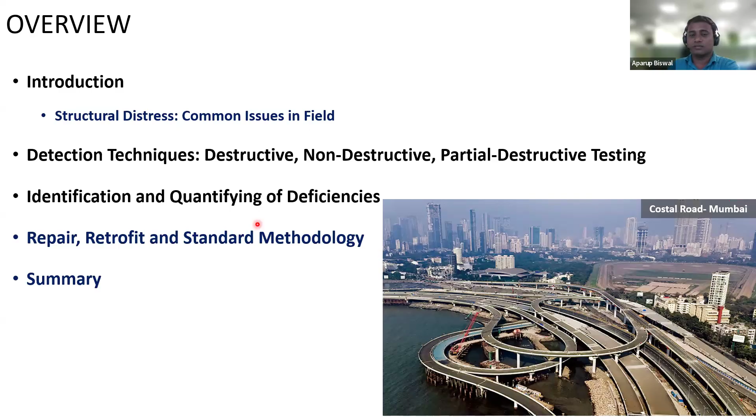These are some projects, I don't need to explain them deeply, you all will be knowing this has been happening. MHSR is our high-speed rail, where you have single segments, meaning a full scale, full length box girder. We have track slabs running from Delhi to Meerut trains. We work on tunnels, and currently we are doing precast water tank stagings.

Narendra Modi Stadium, again you all are aware, and Dwarka Express, where we are using box girders, I girders, those things to build it. Here I have shown you what we do in precast, and what we achieved - the span, which is a 33.3 meter U girder, which is now going to be the largest or longest span available in India for a U girder. Everyone might be knowing U girder.

U girders are used in metro projects where instead of having any box, you have a U shape to run the metro on it. These are some mass housing projects we did. We did 96 days, 96 flats.

This is in Mumbai. A few months back, we did Mission 45, where we got a 6-story car parking done in 45 days. Again, this starts only from the superstructure part. I am not talking about anything on foundation, which is not to be considered in precast.

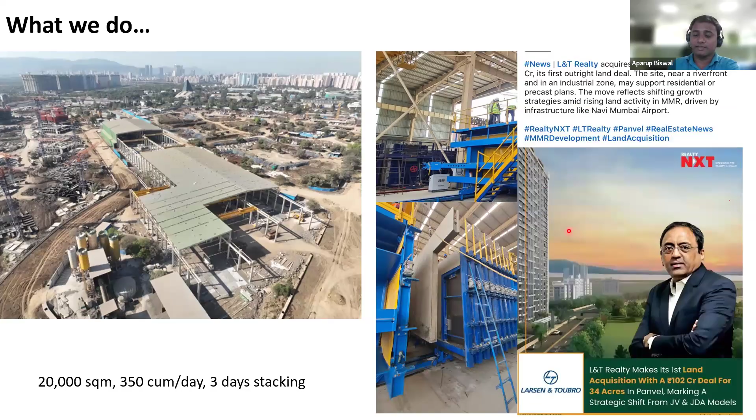Let's come down to today's topic. This is Mumbai. I know you all will be aware that we are growing, in both the verticals. Somewhere we are growing horizontally, cutting down trees and occupying the areas. Somewhere we are growing vertically. Are we growing fast enough to get accommodation for all our beings? I don't think so. We are having so much shortage.

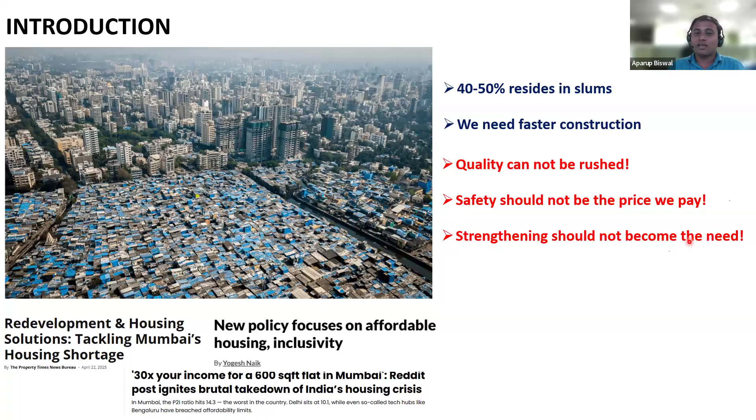But remember, to achieve all this, we should not compromise. We should not compromise on quality. We should not compromise on safety. And finally, strengthening should not be needed on day one. On day one, we should not be targeting that we are going to do some strengthening. And that's what is happening in many projects. Many projects from day one are going to strengthening.

Strength and safety is answered, but what is not answered in non-structural cracking is serviceability. Maybe my structure may not perform to the intended function or intended life, or it may show leakage, dampness, corrosion, or vibration. Those are due to these non-structural defects.

When it is structural, you need to go for strengthening or some sort of enhancing the strength. Both topics will be covered, I think, by multiple presenters or researchers that you will be hearing. I'll also be touching certain parts out of it.

How do you detect it? You can do destructive testing starting from core. Core is obviously destructive - you take something and break it. You can also do non-destructive or partial destructive testing. We'll touch on those slightly, and go to the test parts a little bit too.

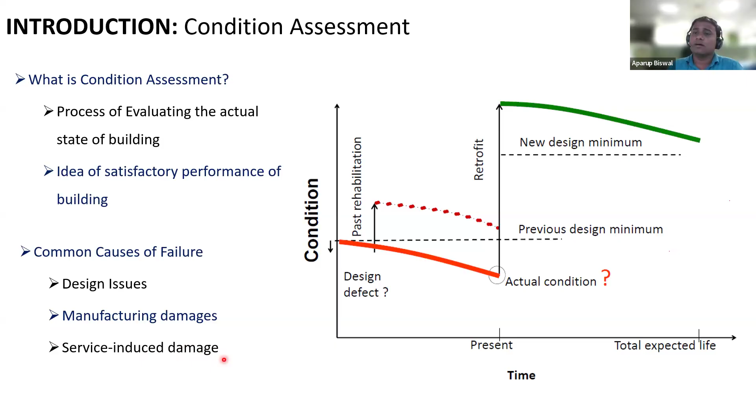Now, for these two, you do condition assessment. And then what causes are you looking at? You may look at design issues, which come due to the designer's mistake or miscalculation or misprediction of the forces. Manufacturing damages mean something which has come because of construction issues. Service induced generally means you have intended for X amount of load, and now you are applying something higher.

Let's see some more details. Once you go to do condition assessment, you do initial inspections. You go to the site, you inspect the structure for which you are doing the condition assessment. And in that process, you may go for a detailed investigation.

In that report, you will point out what other type of test and analysis you are going to do. Then you report it. The main part we sometimes miss is we don't report many things we observe. We may think it is non-structural and doesn't hamper structural safety, but at a later stage.

That small part is going to lead to structural failure. Then, what symptoms or causes will emerge? Like once you go to a doctor and say I am having this disease, he may not treat only the disease, he may ask you lots of questions. So we should be thinking about lots of questions here. What is making this happen? Is it because of life which has gone for corrosion, or is it in the initial stages where thermal and shrinkage cracks have come? That is going to come for high strength concretes, and slowly we are looking at more higher strength concretes.

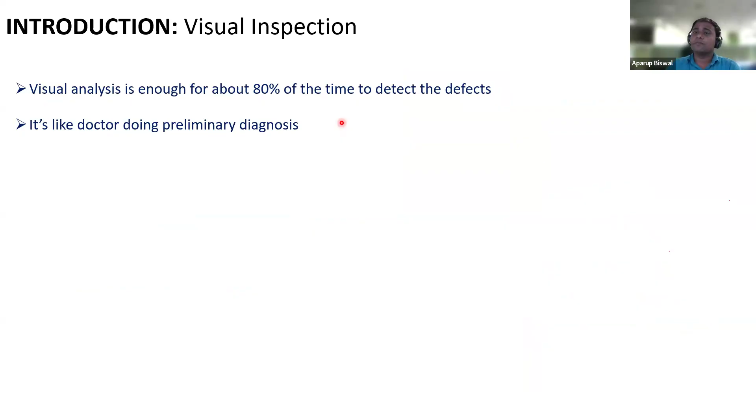Now, once you go for inspecting, you do initially a visual inspection, and mostly 80% of the defects you will be able to find out. It's not that you find out and stop there - you report it, you note it. It may be helpful today, or it may be helpful tomorrow based on structural performance. Then, what you will be using - so many things are there.

You may require multiple of these things to assess a structure, and these type of defects you may be able to see. You may be seeing some honeycombing, you may be seeing some cracks, you may be seeing dampness, but those localized reports are actually going to help us while doing rigorous structural analysis or trying to find out what has caused these things.

What limitations do we have in this visual inspection? Who is going to do it, whether he is qualified to look at it, and what he is looking at. Again, it may be reliable, or it may not be reliable, depending on the person who has done the visual inspection.

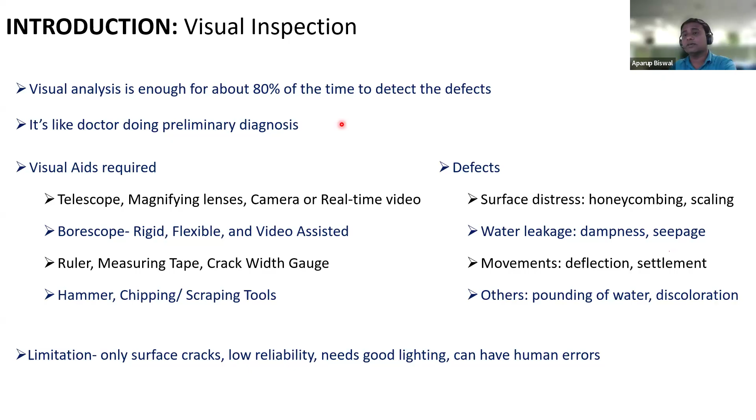Now, once you do visual inspection, you have concrete members. You may look at cracks, which are these. You may say, okay, I have a fine crack which is 0.8 to 1.5. Someone else may not notice it. You may say, okay, I have a medium crack which is between 1.5 to 3. These are some examples I am writing.

You may not be able to see certain cracks. Maybe someone else is able to see because he has better eyesight, or he has gone with better instruments. Similarly, when it comes to steel members, you should be looking at all these - whether a bolt has corroded, whether a member has corroded, whether a member has buckled locally, or is showing some crippling or local buckling.

So again, this depends on who is inspecting and what is being inspected. Let's assume we are going for a bridge inspection. We may not be following all these rules at every location. I know this is a flexure-governed location, so I may be looking at flexural cracks, and when we go to shear-governed locations, we may be looking at shear cracks.

Now, this distinction makes sense only if you are qualified to know the difference between flexure and shear cracks. If we are not aware of what to look at, then we end up doing a wrong report or wrong visual inspection.

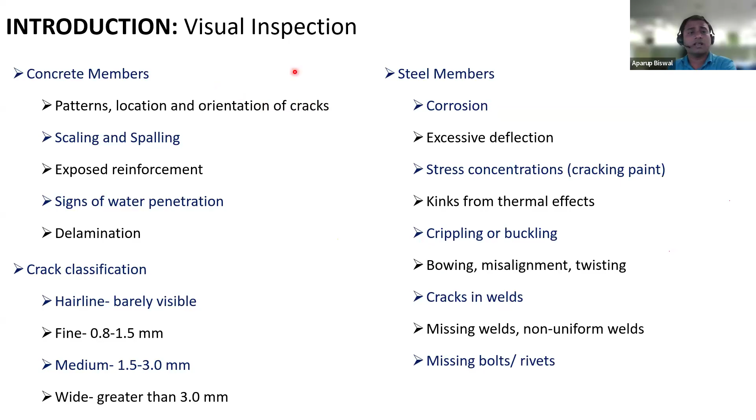Now, based on the visual inspections, it is common practice that we come up with a non-destructive testing plan. From the non-destructive testing, what will we be looking at? We'll be looking at multiple activities depending on what structure we are doing. Let's now go to the detection techniques, which include destructive, non-destructive, and partial destructive methods. Wherever possible, I will give you an example.

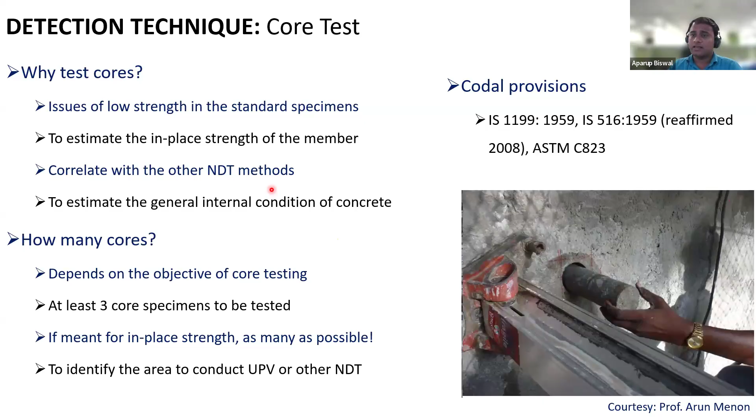Whether you are crossing the reinforcement or cutting through a confined area, you may get a higher strength, and maybe that's not the required area. So you should find out which area to take the core from and what ultimate strength you are looking at.

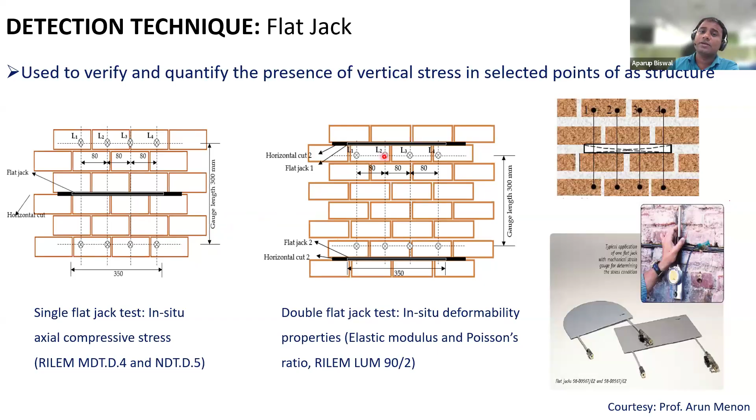Why do I need it? I need it to assess the life of the structure, to know how much load I am expecting, because for many structures we won't be able to calculate the actual load. Sometimes these masonry structures are not homogeneous structures; they may have multiple leaves inside them. In those cases also we need to know whether those effects are present or not.

What can be the error here? Multiple errors. Like I told you with core cutting, similarly here, depending on the morphology of the structure, we may have errors, which we need to take care of properly. This is the standard case which we are expecting, but we may get multiple different cases. Now, how is that done?

Let's take some local pier at a particular location. Initially it is marked and initial readings are measured, using a DEMEC, which is a mechanical gauge. Initial readings are measured, then you mark where your flat jack is going to go. You fix the device which holds the cutting wheel, then you cut it. Then again you start taking measurements. In that sense, you will be able to know how much load was present, with those limitations I pointed out.

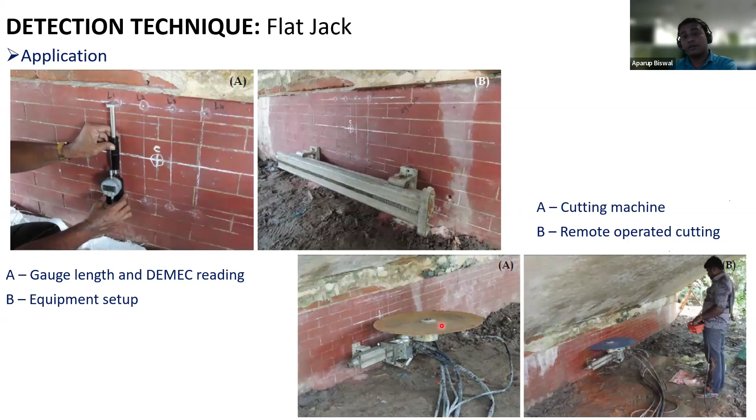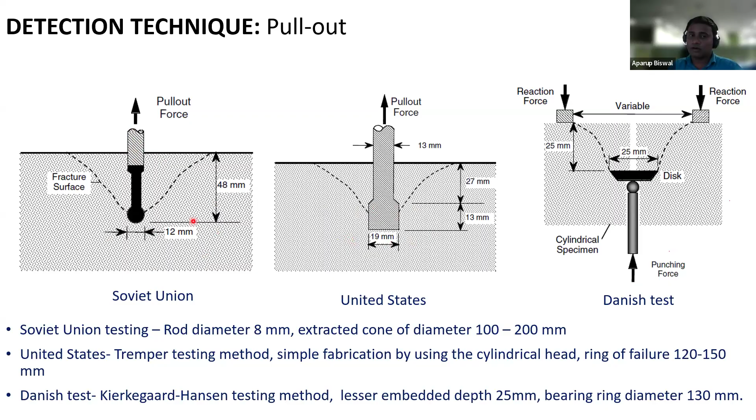Sometimes we install it prior to know the strengths, and sometimes we do it on the surface. This is known as pull-off. Again, from the pull-off strength, we are expecting to predict the compressive strength. These pull-out or pull-off results depend on how many repetitions you have and how you have calibrated your graph. That means you should have calibrated your graph well beforehand, to know that if I have a pull-off strength of 1 MPa, I'm talking about 15 MPa concrete; if I have a pull-off strength of 4 MPa, I'm talking about 50 MPa concrete. So these things matter.

Next is the rebound hammer. I won't go into it much. This has limitations and multiple methods to read it, and sometimes it only reflects the surface-based concrete quality. If you have done proper packing at the surface base, you may get a higher strength reading.

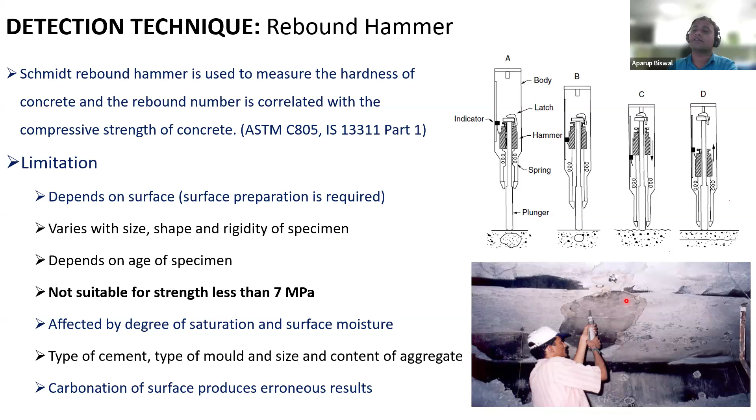Then that doesn't convey that your structure has the highest strength, whatever you have reported from this test.

Let's come now to a widely used, I can say misused, test: UPV. There are three methods - direct, semi-direct, and indirect. All three methods are being used and you get some output.

And based on that you reported the quality. It depends again on what thickness you are looking at, what material you are looking at, whether the material has any defects or not. We'll see some examples of this also.

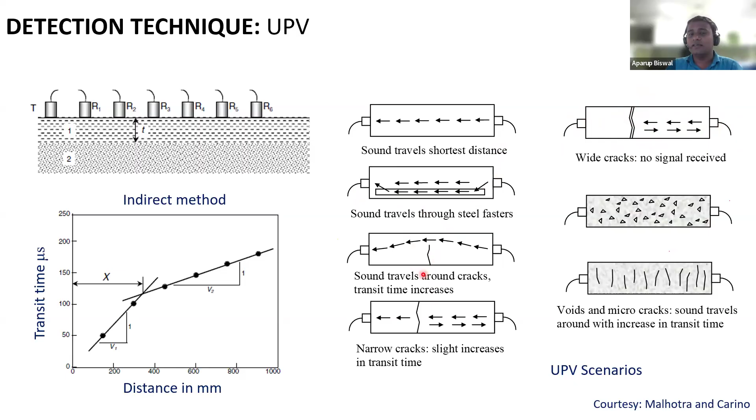Again, reinforcements will affect the results a lot, and we can use UPV to get the crack depths. I will show you in the next slide how that has been done.

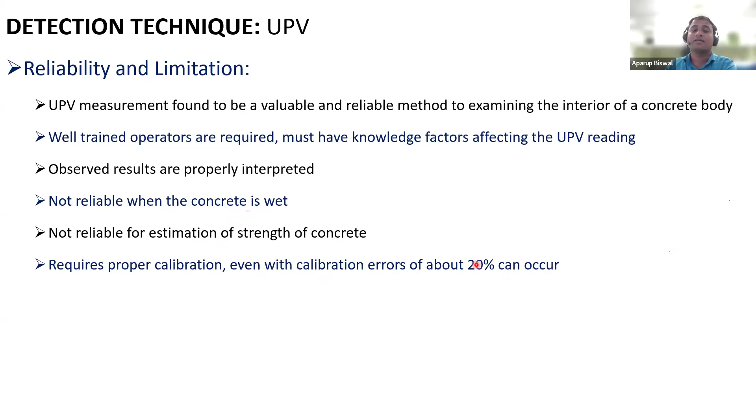Now, is it reliable? It is reliable depending on who is taking the measurements, and not reliable depending on what conditions he is taking the measurements in. As I pointed out, it depends on how much steel is there, whether you have moisture in the concrete, whether it is raining, or whether it is a very dry day. All these factors will matter, and you can have a calibration error of 20%.

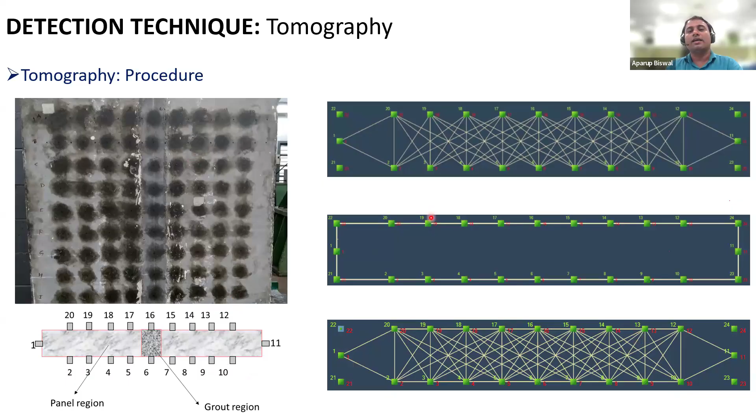Too close between the probes are also dangerous. Too far between the probes are also dangerous. And what is the intended path which we have in this flow? Then what is the periphery that we are looking at?

So we can go to various tomographic available softwares and start doing data input, then do preliminary work, like what type of paths we are looking at. Then we defined what area we want to concentrate at.

Then meshing is the parameter where you know this is the probe distance you have taken. So if I say these are the two points which I have taken, based on that, how finer I want to go in the tomographic curves.

What tomography will do is, whatever data we gave it, it will start calculating the error. Error means it knows from here to here the path is having a distance x, and the time taken by the machine is t1. From here to here, the path becomes x plus delta. Time taken should have been t1 plus delta 1.

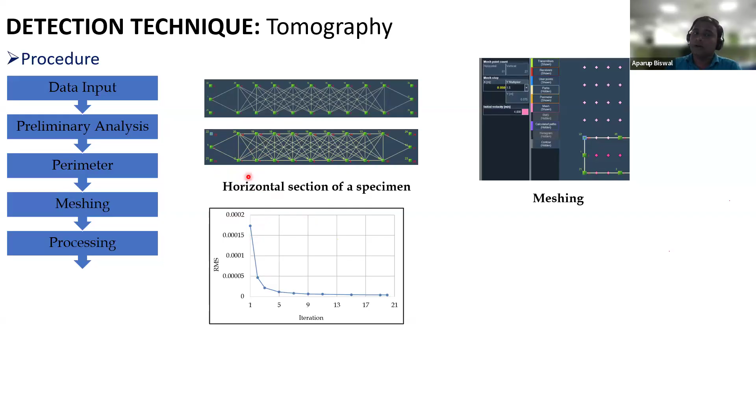Now let's assume the time taken is something else other than that. So it starts calculating what could have been the alternate path it took to reach that point, and it has multiple options to take. Based on that, it will start telling you the intended error function you had. Beyond that, how many points are there, and below that, how many points are there.

And it starts giving you a plot which is a velocity contour plot having different colors depending on your intention. So my intention here was to give 4000 as good quality concrete where concrete has no defects, and 2000 being the least poor quality concrete where concrete has some impurities, defects, or interfaces or something.

So what I can show you is that something is happening in this zone, and in these dark zones it is good quality concrete. So that we understood initially by UPV, where I showed you the curve changing the slope between the segments.

Similarly, you can see here where I have taken two different cases, one with defects, one without defects. You can see tomography is easily answering that. These are the zones where defects are concentrated, and it requires certain concentration, certain strengthening, or certain intervention like grout injection, which can be taken care of locally in these regions.

When it comes to this case, we are almost having a uniform concrete. I should point out here and here I have the joints which are supposed to have some defects, but that has been taken care of in the hacking, meaning roughening of the joint and grouting while filling those joints.

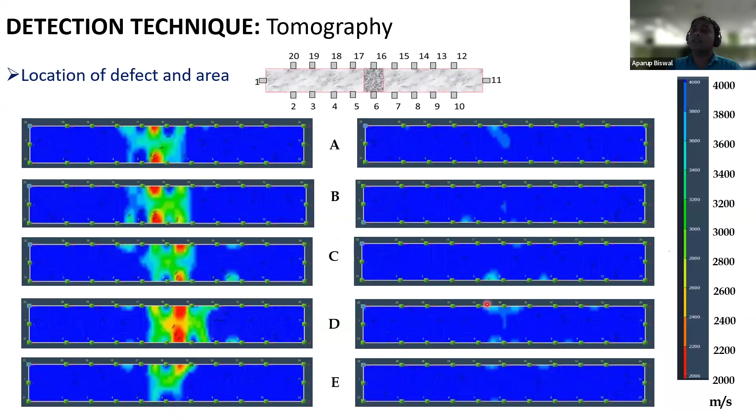And marking of patches where higher values are there and lower values are there, where a little bit of intervention may be required by means of injection of grout based on various methods.

So we don't stop here. From here, the strengthening people will take over. They will start analyzing your results or findings and start devising the method how that can be strengthened, or grout can be injected, or seepage can be stopped.

Again, is it the best method which gives us everything? My answer is no. None of the techniques can be the best. You need multiple techniques to answer the same question. You may be looking at it multiple times to find out what is going on in the methodology.

So what can go wrong? We have properties which are multifold. We have properties which are nonlinear. We are talking about materials which are nonlinear. So the first thing that is going to affect us is nonlinearity in our materials, members, or interfaces.

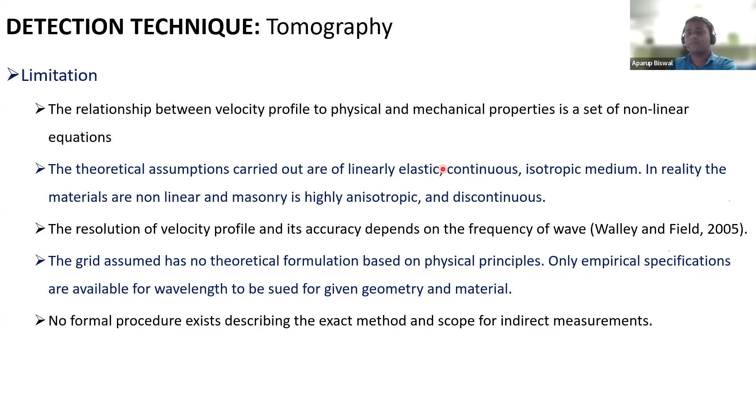So with that background of non-destructive testing, I don't know whether questions in between are allowed or not.

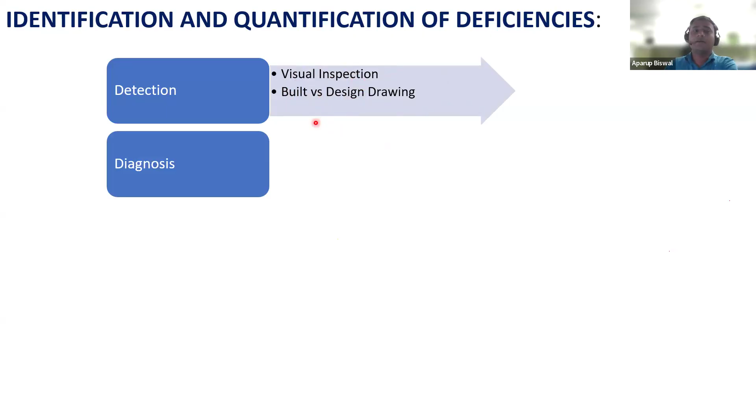Then you go to diagnose. Here you adopt a method from NDT or DT. Then geometry verification, here I'm talking about the sizes. You may think everything will go fine, but the person reading may have read 300 as 200 and 600 as 300, and end up with a different size. Whether that has been verified at site level, I doubt, because so many structures are going on. We have limited engineers at site to verify, and sometimes we depend on the contractor directly, or an unqualified contractor, without thinking much.

Then analysis. Preliminary is always like what you did in design with software, trying to understand whether the design and the intended function of the structure are being satisfied or something else is there. Then you take a decision. In this decision, you may think about going for micro or macro level finite element software and going deep into the analysis. I may compare the design intent and go with deficiency calculation.

Always remember, after diagnosis, if the preliminary report says everything is answered—let's assume the beam should be simply supported, but in design intent it was continuous, and on site we achieved a simply supported beam—the beam is going to crack. Now I know the answer, so I should push it back to the original position if possible, strengthen it depending on requirement, and get the continuous arrangement available.

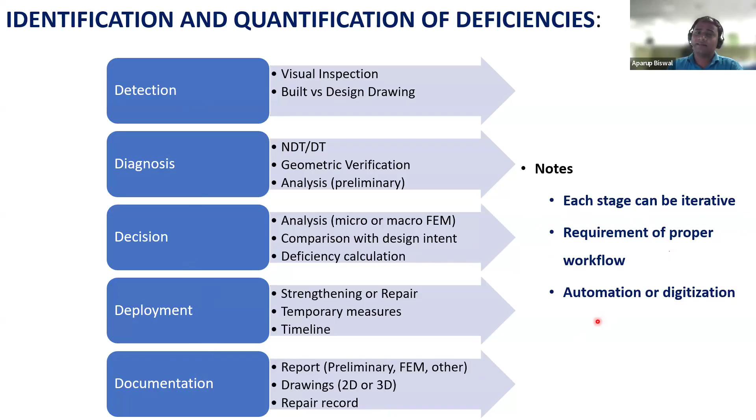Then I pointed out in every slide that you need to report. You need to have proper drawings - we are engineers, we will only understand drawings. It may be 2D or 3D, depending on the project requirements. And what did we do to the structure? Did we repair? Yes, then please note it down. This is what has been done to the structure during construction, and this is what has been done after construction. So each stage can be iterative. It's not like once I wrote it, this is final - I might have not followed all these everywhere. Then these workflow requirements will be dependent, and we may automate or digitize the processes.

Let's now go to some finite element example. Here I'm just talking about what finite element can do. You can go to any member - it can be column, beam, or anything depending on your structure. You do an initial model, which we spoke about, it will always be a line model. Then from the line model, you understood that you are not able to understand a few of the concepts, few of the transfer mechanisms, or few of the designer's intentions. The designer is strongly telling that it is safe, and the contractor or client does not have any faith.

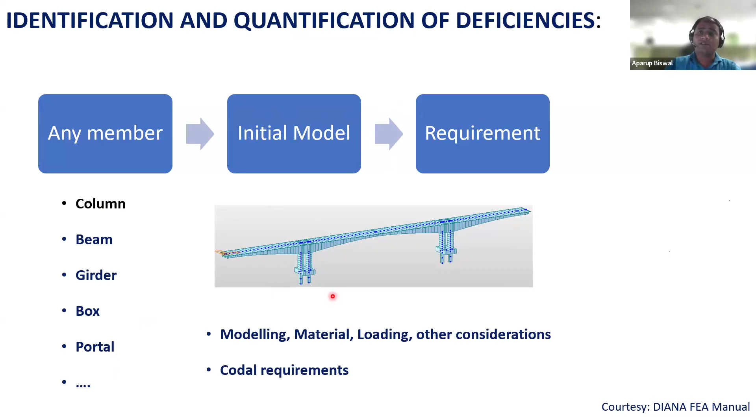He is telling that no, it is not safe, it has these many problems. Now the designer wants to prove it, so he will go to the rigorous finite element, where I go to a local element. Now here I showed you the complete span, which is a balanced cantilever having everything - bearings, pile cap, piles, piers, every detail. But when I came to here, I want to prove only the concept of the box girder, or only the concept of the diaphragm, or only the concept of some part where I want to show.

If you are able to see it, good. If you are not able to see, just put a question mark and send it to your designer or whoever is going to analyze it. He has to answer these - how these have come.

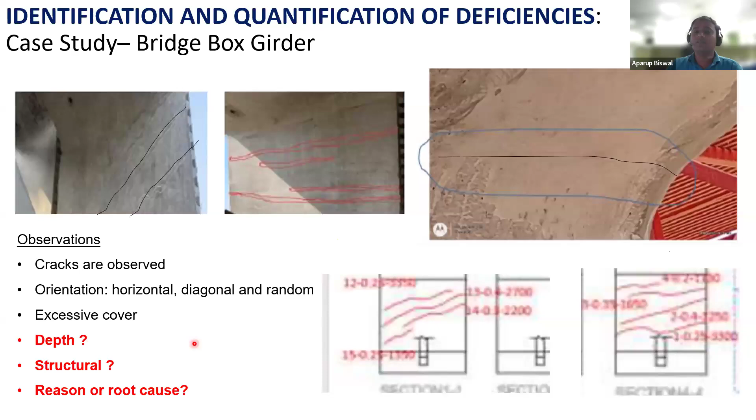So let's see what extra data we saw. This is not the real picture, these are also not the real pictures. You saw that cracks are there, and you took cores. So some NDT has been done - that means UPV, rebound hammer has been done. Then core cutting has been done, and crack depths were shown.

So now in these observations itself, it says that some cracks are stopping here. So now you need to know whether it is cover - if it is cover, how much cover it is, because sometimes you may end up with higher cover and end up with a crack. Your thermal crack has gone till the cover depth, or shrinkage cracks have gone to certain depths - find out the pattern of the crack. Based on the pattern of the cracks, it will show how it has been done. Now go to the analysis software, start analyzing and understanding the results. So here, some schemes were decided, what can be the cause, what was the root cause, and how the cause is being treated - that has been identified.

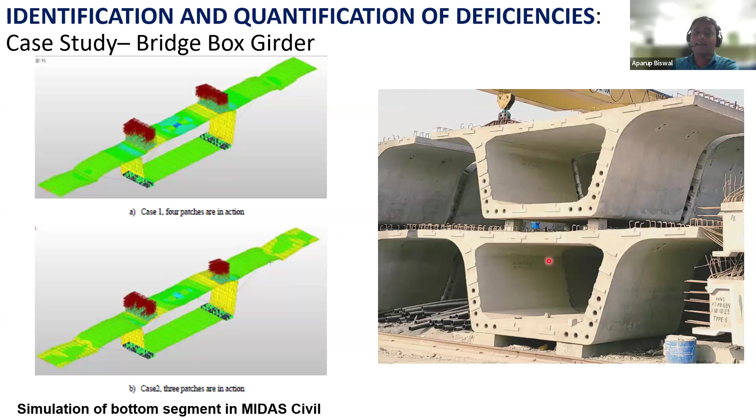And finally, the results are shown, like we saw some lines marked earlier. These are the straight cracks which are possible. We saw some lines going slightly inclined - these are the patterns found out. And we saw some diagonal, pure diagonal cracks - these are the regions found out.

Remember, all these are bending moment plots found based on the analysis for a particular case, and the results are found, and based on that, the crack patterns are predicted. In this prediction itself, we'll start predicting what has happened to the rebars, whether the rebar has yielded, whether I need to replace them, or do I need to strengthen them.

Let's take one more case. I showed you one case with a bridge. Let me show you one case with a building. Here, this part of the beam was resting on this beam with a support, and what you see is failure of this corbel. There are multiple locations which are supposed to fail in the later stage, and we need to find out what can be done.

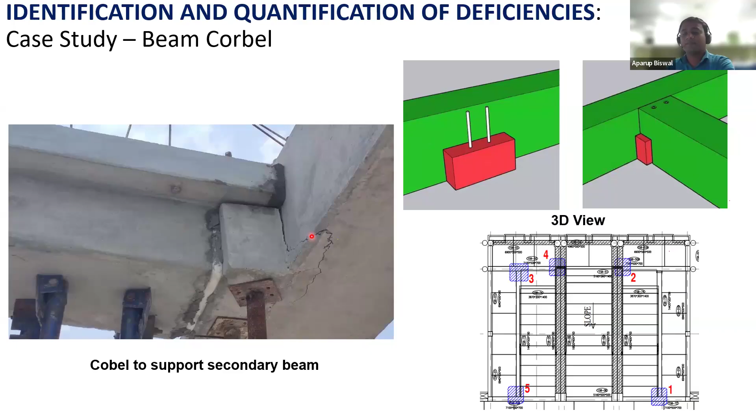So this is what was intended. This part is supposed to come from the primary beam with some dowels, and this green color beam has to rest on it with that dowel and do the function. What next? Let's find out what can be done.

This is being done because at certain locations the loads were quite higher, and only this cleat angle with these bolts was not sufficient. Now the load has to be transferred to the beam top by a mechanical arrangement, where this hanging arrangement was built and the load is now getting transferred from this part of the beam to the green part, which is the monolithic part.

Now, once you do that, you will ask, like, what will happen to the corrosion? What will happen to the service life? Will the steel part always be visible? Now we need to hide it. So you see some casing, and then we start putting it with the grout.

When it comes to analysis, individual parts are analyzed for different forces. And in this part, intentionally, all loads are analyzed for one part itself, so that the bolts are always safe. If, because of some uncertainty, one part is not erected properly or not fixed and the load is live on the structure, then a single part has been taken. Then failure modes for the bolts, failure modes for the plate, failure modes for the sections are taken, and the final strengthening scheme is proposed.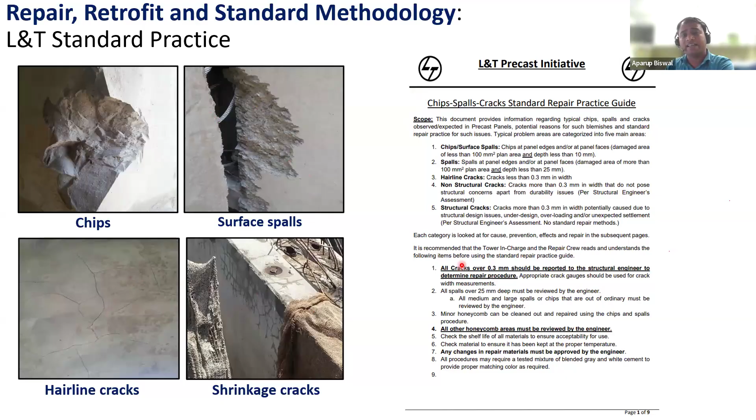It will be the diameter of the bar - are we talking about smaller dia bars, larger dia bars? What is the position? How far has it gone? What orientation is it supposed to be? And what strength of concrete are we talking about? It's not like we can drill anywhere or fix anywhere.

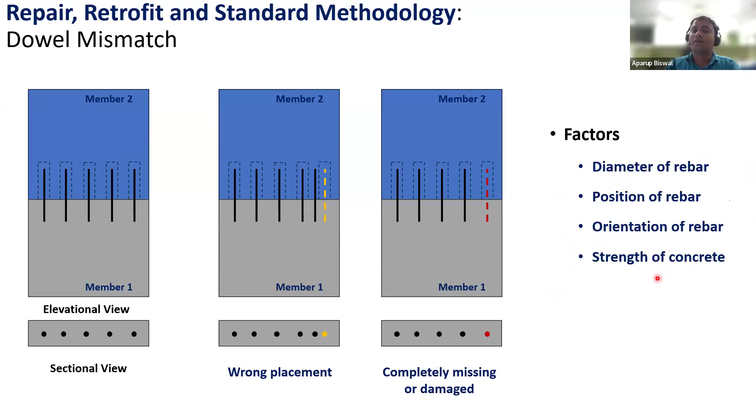Based on that, we come up with certain methodology, like we need to drill, we need to insert a new bar, if a dowel is required and installation is required for a new dowel, for the dowel which are locally adjustable, like the one we talked, which is just next to the dowel tube.

So what can be done? You locally chip out the concrete, bend based on the design requirements, which is 1 in 6. Everybody on site will know how to do that. Based on that, you change the orientation and get your intended function. That can only be done if you have sufficient depth available to break out, or sufficient width available to break out, and you are locally able to adjust it.

Otherwise, you go with a new installation method. Then you start reporting it. That's what is being followed. Intentionally blackened out or covered details which are not required to be shown to you.

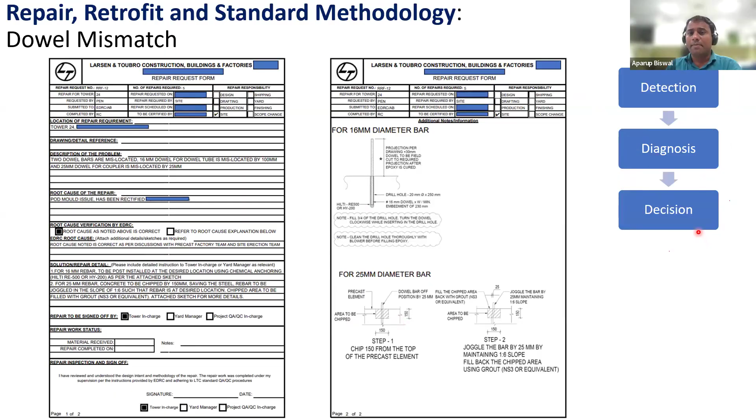So what we have followed is: detect, so you find out what is going on; diagnose, you find out the cause, what has been required and where it is now; take a decision whether it is new Hilti or old being bent; then deploy your method, do that; finally, you document it. These 5D techniques need to be followed, and you do it so that you have a proper report for your future and for your next project.

Before taking up the project itself, you can tell, these are going to be my methodology where I do these works in this way. Now let's take one more case where I have a beam...

Now let's take one more case where I have a beam coming from two walls with a cast-in-situ slab. So this color is CIS slab. I have two orthogonal walls and the beam is there. Now the top bar of the beam goes into the CIS slab, and the bottom bar of the beam is supposed to go into these walls. And we have completely forgotten to remove the rebars from the walls, and the beam is now being readied to cast.

Now in this case, the designer would have told you, okay, for this beam, I need 3 bars here. Now, if you see, this is only some 150 or 200 mm. A bar in the beam can never be developed here. And if you go to any mechanical anchor people, they will tell you, I cannot develop it either. And you can never drill perpendicular like this and bend a bar. That also cannot be inserted.

When it comes to the top, you have freedom. You can just put a rebar at the top in the CIS concrete and do that. So here what matters now? Diameter of the rebar we are looking at, position of the rebar where it was, orientation - like in a thin wall, it's supposed to come like this - and strength of the concrete, thickness, do I have sufficient thickness to drill in? And again, orientation of the panel also matters. In this panel, you may have sufficient depth to drill in and put a bar, but in this panel you didn't. So these are the certain requirements.

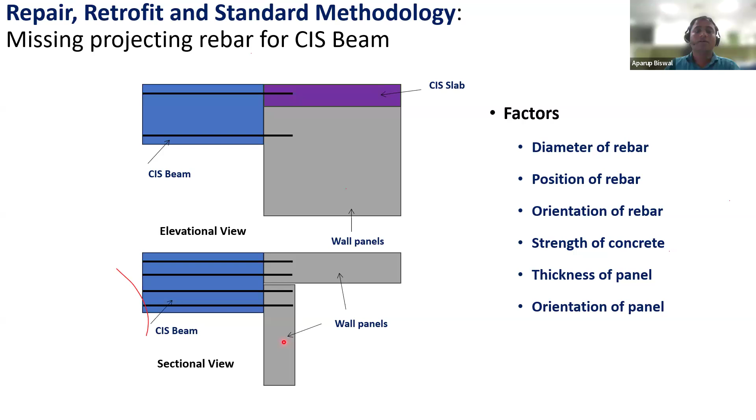Now let's see what has been done. The designer requirement was 3 rebars. Intentionally, one extra rebar is added. You all will be aware that if development length is not properly available, we can increase the steel based on the development length required. So based on the same scheme, increase in steel is proposed in the part where lesser drilling depths are available; where larger drilling depths are available, the actual rebars are kept, and at the top, because it is CIS concrete, that also is taken care of.

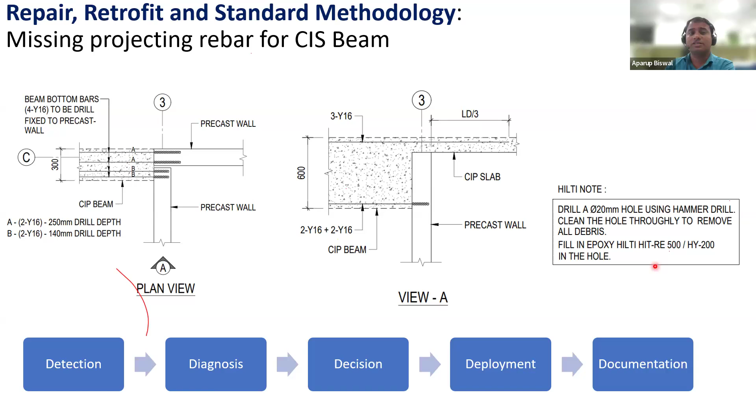As I told in the beginning, I belong to precast initiatives, and we have a lot of precast planks. When I say planks, they are thinner sections, but two-dimensional, meaning length and width are higher. Once you cast it flat, you are susceptible to getting a lot of shrinkage cracks. Those are non-structural in nature. They may not hamper your structure, but we need to close them. So now we will see some grouting methodology or injection methodology for those. So now what will matter?

Slab design consideration: how the slab is designed, whether this is just a sacrificial layer or part of the main CIS concrete. Normally it will be part of the main CIS concrete. What thickness and topping thickness are we looking at, and what type of waterproofing is done on top, because all those cracks can go through and through, and if not sealed or protected properly, you may get water leakage.

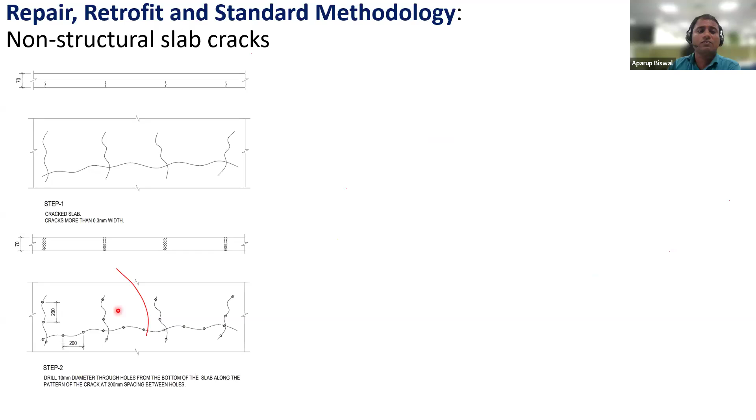Let's see certain patterns of the cracks based on these and certain holes you are seeing. Those are the holes where we intended to fill through injection grouting, with a top epoxy nozzle grouting. It may be injection or gravity, depending on what height or depth it can flow through. It may not have penetrated full depth, only locally it is there.

Same as before, you mark the grid, then mark the holes wherever it is going to be done, then inject it from the bottom, but you need to seal it properly. It's not just the epoxy injection, because it starts leaking, so you need proper sealing.

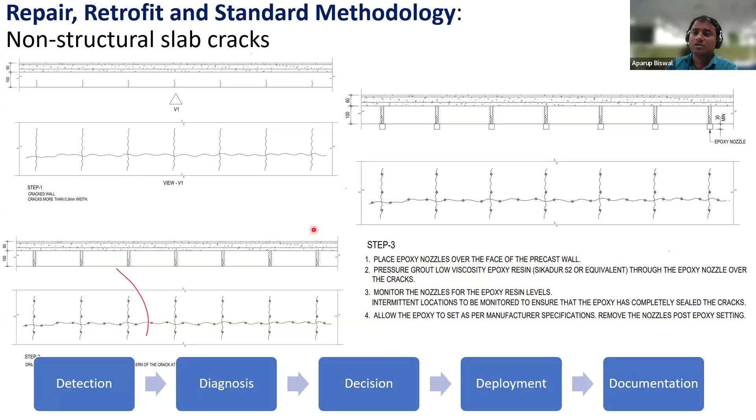We take the same 5D methodology: we detect, take the diagnosis, think what the designer intended, whether it is non-structural or structural, whether it can be closed, whether waterproofing is there. Then take your deployment and document it so that in later projects it helps you, or in current projects, whenever an inquiry or investigation occurs, you are able to support that with the data.

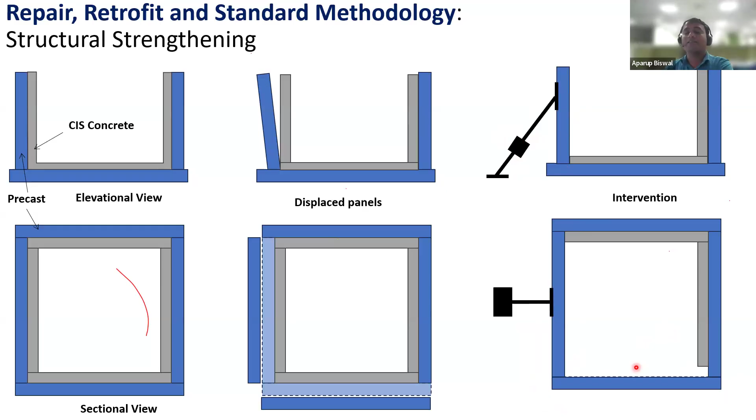Now this is straight. Can I stop here? No, I need to do something else. So we calculated how much force is coming here. Luckily, we had top concrete where we were able to anchor it. We re-established this connection and bent it properly so it is anchored. We inserted these with the walls and locked it to the top concrete so that all those forces, which were coming as a cantilever, now come as a propped cantilever. So now there is a prop here, a support here. It may not be fully fixed now because there is certain rotation happening.

Same method: we took the detection, we diagnosed it, then we took the decision based on the diagnosis, then we deployed the methodology, and finally documentation is done.

Slowly we are moving towards the summary of this presentation. Again, I told you some slides earlier with the Statue of Unity, which was built by us. So what we saw is the 5D technique, which is applicable to all concepts, starting from finite element parts, non-destructive, destructive.

I don't think I have gone deeper into those methods. There are various other methods - infrared, ground penetrating radars, impact echo - different methods with different requirements. I have not gone deeper into them.

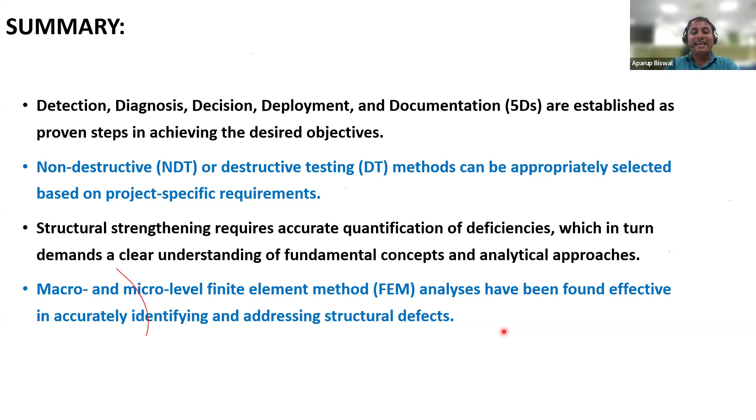So I end here. Let's open it for the questions. Thank you all for listening and not disturbing in between.

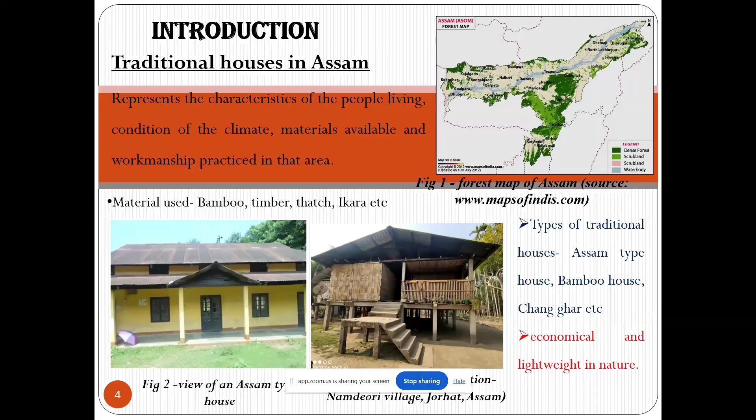Talking about earthquake hazard, we are in seismic zone 5, and we have seen devastating earthquakes like those in 1897 and 1950. We also have frequent earthquakes, such as the 5.5 scale earthquake on 14th September, and a 5 scale earthquake on 22nd February. The point is that we are very vulnerable in this region, and for that purpose we have to think of a proper solution.

Now, talking about seismic response, we know that base shear is dependent on seismic weight, as VB equals AH into W. Obviously, base shear is directly proportional to seismic weight. So if we can somehow reduce the seismic weight, the base shear will reduce, and vulnerability will reduce. This is the plus point with bamboo structures or wooden structures.

Now, why bamboo and not wood? Because bamboo has some inherent advantages over wood. A full-fledged bamboo tree will be ready for construction in 3 years, while wood or a tree will take 20 years for full-fledged growth to be ready for construction. From that point, bamboo is very favorable because in 3 years the bamboo can be used. The life cycle is shorter, so it is more favorable.

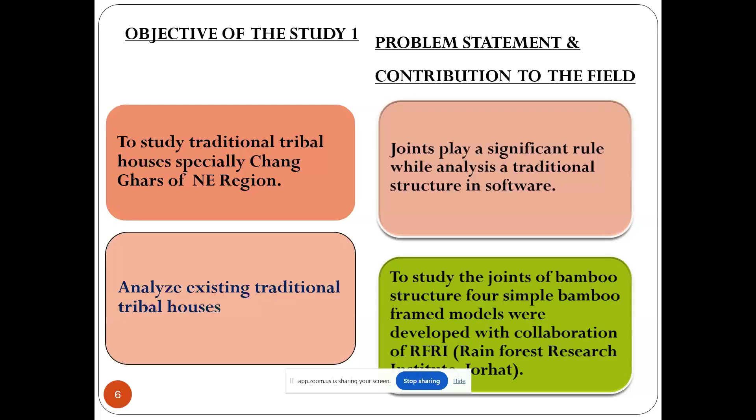For that purpose, we had to study the joint characteristics of how traditional buildings have their joints, because to get the response or to study them, we need to analyze them in software. So this study was done to know the properties of the traditional joints.

These are some of the literature reviews.

The case study was done in Namdeori village, located 17 kilometers away from our college. This is Deuri Gaon, Deuri village, where a survey was done of different changhars. There are many changhars there, and they went through some of them, classifying them into various categories.

Looking through the figure, the bamboo floors in the changhars are typically of this kind.

Is my cursor visible? Yes. So actually there are beams, and on the beams there are whole bamboos.

On the whole bamboo, there is another layer at 90 degrees, which is the half bamboo, and on that the basic floor kind of bamboo material is laid.

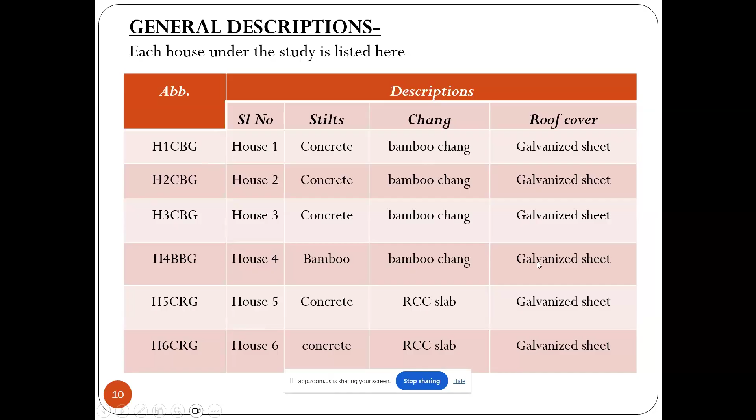With the proper photo it will be clearer. In CBG, the columns were concrete columns, then the bamboo chang, where the floor was bamboo chang, with only concrete columns there, and the roof made of galvanized iron sheets. The roof may be a bamboo roof truss or a wooden roof truss.

Likewise H3 is also CBG, so it is a concrete stilt. And H4 is a bamboo stilt, bamboo frame, where all components are made of bamboo.

There are some other categories too, for example CRG, where the stilts are concrete, the floors are also reinforced, and the roofing is galvanized iron.

Now talking about H5 and H6, they are basically reinforced concrete structures, having reinforced columns or stilts, reinforced beams, and reinforced floors.

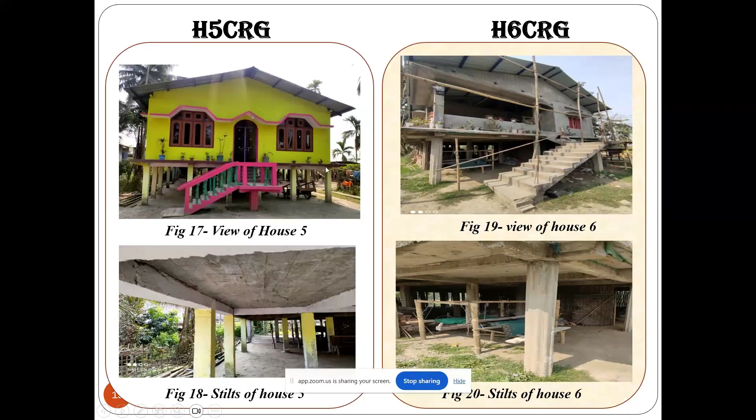Talking about H4, which has whole bamboo joints, we are going to focus on this kind of structure. H4, BBG, means bamboo stilt, the floor supported by bamboo beams, and galvanized iron sheets — this may also be thatch sheet, no problem — meaning the whole structure is made up of bamboo.

The methodology was first to design and analyze the bamboo stilt house in SAP2000. In analyzing it, some problems came up because, since bamboo is so widely available, the bamboo joints are not like RCC joints — it's very difficult to assign properties to the bamboo joints, making the modeling very complicated.

Anyway, assigning normal properties, the model was done, taking the model geometry as in the case of H4.

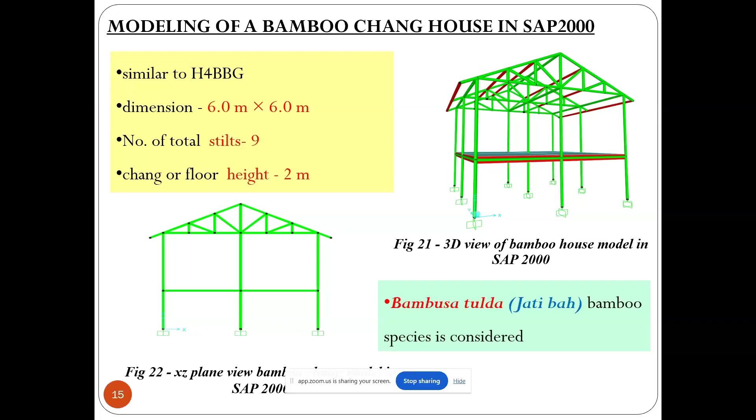Bambusa tulda, the Jati bah bamboo species, was considered, and the bamboo cross section was designed. The various parameters were taken from NBC 2016 Part 6, and Section Designer was used to design the bamboo section, with other information also taken from Part 6 of NBC 2016.

The concrete stilts were also modeled. They posed no problem because this is basically an RCC kind of structure.

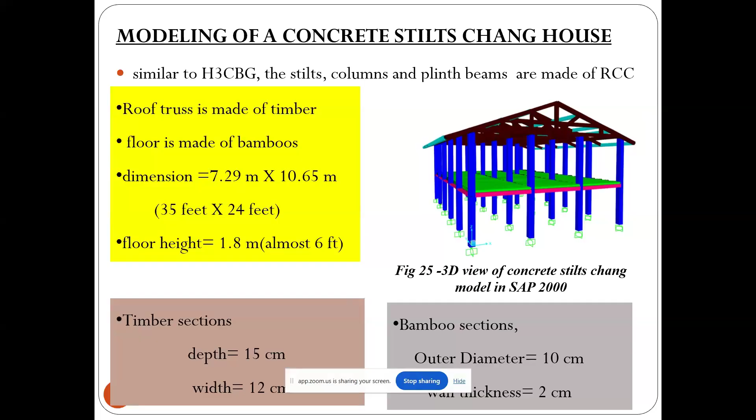Assigning the basic joint properties was a difficulty, so we tried to solve this problem by testing some models on a shake table.

RFRI, the Rainforest Research Institute, was requested, and they provided us these models. The speciality is that normally, because we have a very small shake table, the base of our structure has to be limited to a size of 30 centimeters by 15 centimeters — we cannot go beyond that. So for that purpose, with different heights, 4 models were prepared.

But taking the bamboo for the model, there was some problem. Because the model was small, we had to take the topmost part of the bamboo. But as a natural material, bamboo has varying thickness — the thickness of the bamboo culm is very high in the lower portion and becomes smaller in the higher portion.

So if we take a smaller cross section, it is not going to replicate the actual situation. That was the problem, and RFRI solved it by using the Noga Bijuli Ba, which is smaller in diameter but has the same characteristics. These small bamboos are full-fledged bamboos maintaining the geometry of our Bhaluka Ba or Jati bamboo, meaning even at small diameter they maintain the inner diameter to outer diameter ratio. So these 4 models were used for our purpose.

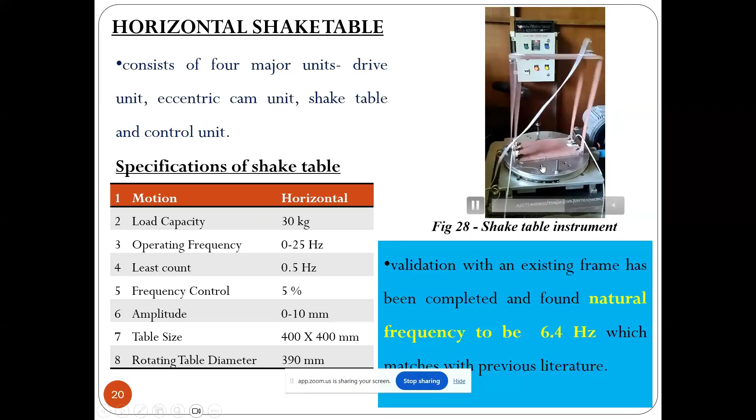So this horizontal shake table was used for the testing. At first, the shake table was validated with a steel model because it was already tested, and its natural frequency was found to be 6.4 hertz. While tested, it was giving 6.4 hertz, so it was validated, and the experiment already done was matching with published literature. When both results tallied, we could go ahead with testing our bamboo models.

The analysis was done in Kampana software, meaning the recordings were done in Kampana software. The accelerometers were attached, and this is the arrangement of the shake table. The 4 models were arranged there, and there is a plot of displacement, velocity, and acceleration in Kampana software.

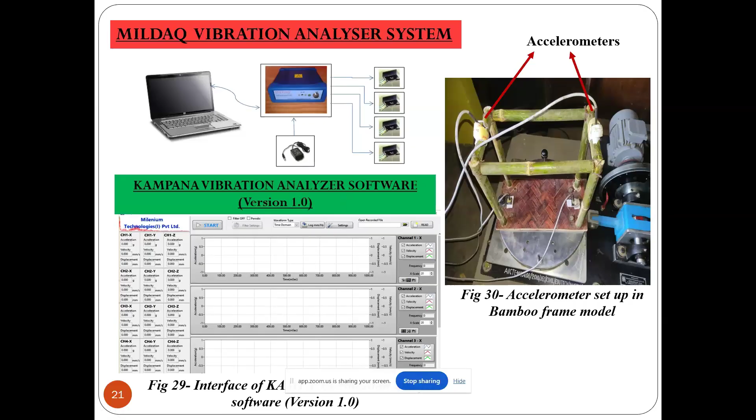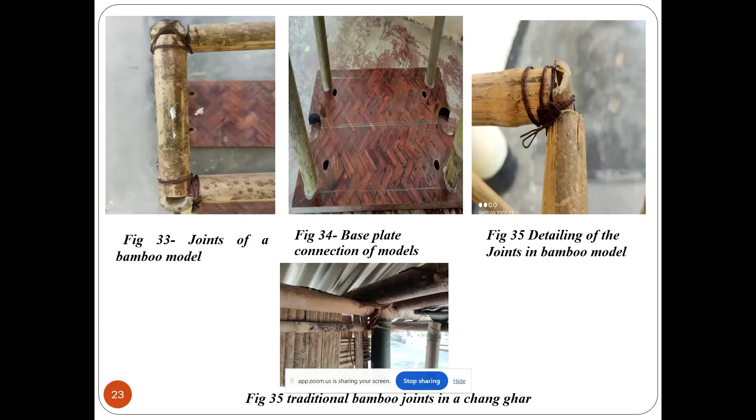So these are some of the results. This is the response of the 0.9 meter frame on the shake table. The 0.9 meter frame was the highest frame, and this was the top displacement, 15.004. The lower line is the base displacement, and the upper line is the top displacement.

In the x-axis, it is the frequency, and in the y-axis, it is the displacement. We got this value, and we got the maximum displacement corresponding to the given frequency. 6.45 hertz was observed, as we see there was a resonance kind of thing, so we can determine that the natural frequency of this particular frame is around 6.45 hertz, which is 40.52 radian for the highest model.

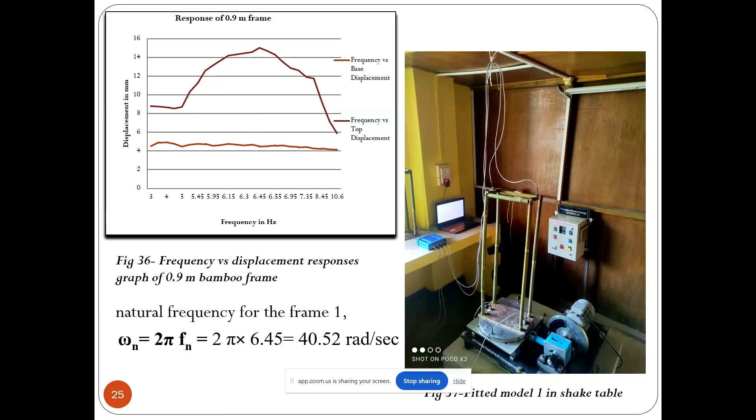The natural frequency found in SAP and the natural frequency found by the formula are somewhat different. A small difference, but there is a difference. This is in SAP, this is the natural frequency found by the formula. So this is about the mode shapes of the frames.

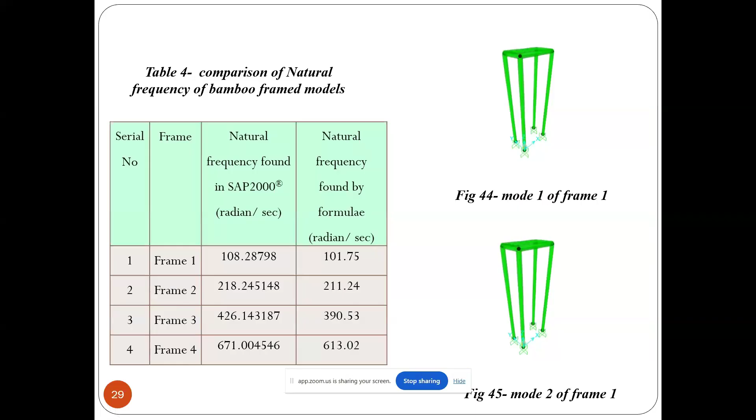So then what was done actually, while using the formula, it was considered that the moment was fixed, then the moment was released, and then one process was done, an iteration for the bamboo framed model. In the SAP model, the moment was partially released to match the natural frequency. The natural frequency originally obtained was 108.28.

As we go on partially releasing the moments, it was nothing but an iteration process, a trial and error kind of thing. As we know, if it is a bamboo structure, it is not like welding, and it is not like a reinforced concrete structure. It is not a fixed joint, it is not a hinge joint, it is not a pin joint. The properties are different. So this was a trial and error method to get the approximate situation of the joint of a bamboo structure.

So traditional joints are flexible in nature, meaning the bamboo joints are flexible in nature, so they partially allow the members to rotate.

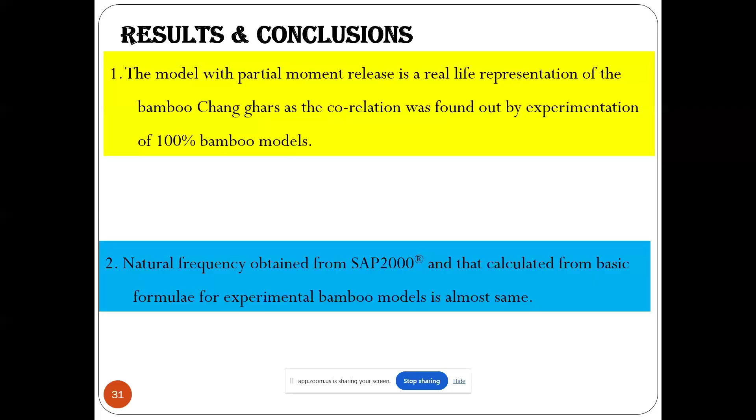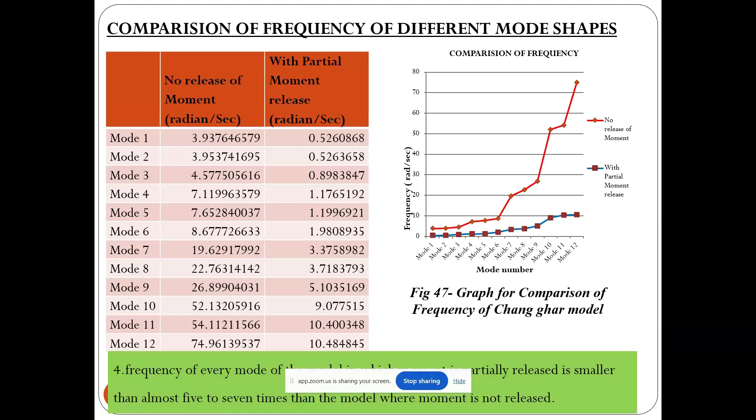So this is our first study to replicate a total bamboo joint in software, and for that purpose this particular work was done. Comparing base shear with partial moment release, the base shear also reduced. If we consider it fixed, the base shear is high; with partial release, the base shear is lesser, and maximum joint displacement of the same model is more when the moment is partially released. This is all about study number 1.

Now going to study number 2. It was a model study, and obviously there is some size effect in the model, so we could not actually replicate the inner joints, because inner joints have different characteristics. So experimental evaluation was required to get the total deflection data or total rotational stiffness; we had to go for a prototype kind of thing. So the next attempt was to do the same kind of thing to get the actual representation in a prototype.

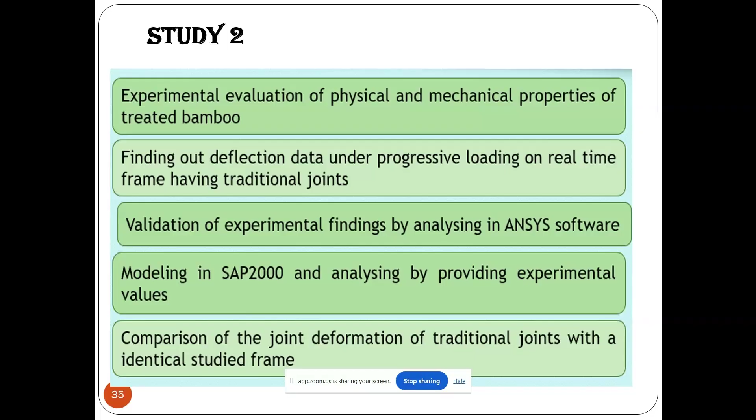In bamboo structures, normally two joints are there. On the outer side, these kinds of joints are there so that the bamboo, along the cut part, is placed - it is called the one-ear cut. In the interior joints, the cut is U type, which is a fish mouth joint. These are the basic cuts in a traditional bamboo house.

So a real-time bamboo frame was set up near the canteen of our college. The height was 2.2 meter and span was 2 meter. The ground was dug to provide fixity or foundation. This was a frame replicating the joint of a real life Chang ghar. Two joints were primarily adopted: our testing was for one ear cut joint and the other for fish mouth cut joint. The diameter of the column and the frame averages 90 millimeter.

So figure 56 is resembling figure 53, the fish mouth, and figure 57 is the one ear cut joint. It is on the outer side, and figure 56 is the interior side.

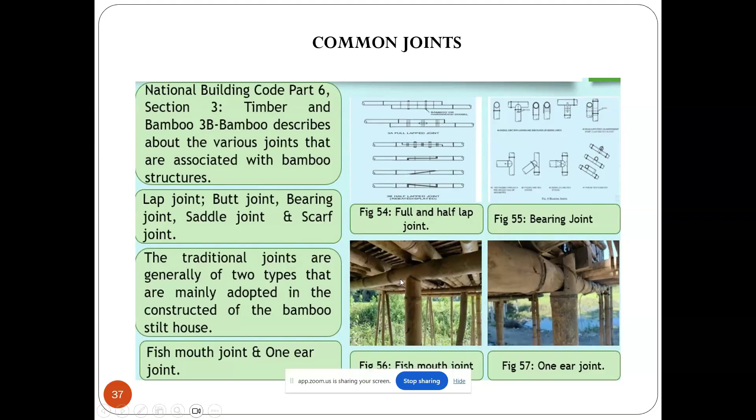These tests were done for our given sample, but nowadays these tests are available in code IS 15912:2018. A bamboo code on construction is there, 15912, and many bamboo properties can be found from that particular code also. But anyway, we need more literature - that particular literature is not sufficient for going for some kind of engineered bamboo structures.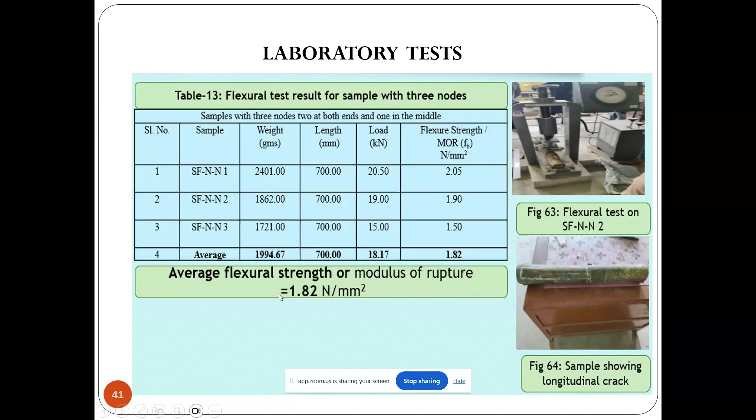Then the laboratory test for tensile strength was also done, and modulus of elasticity was found from the graph plotted.

Some tests were done on the moisture content, and average moisture content of the samples when brought from RFRI was found to be 70.24.

Then coming for the field test, fish mouth cut is like that, one ear cut is like that. The load versus rotation plot was done. It was difficult to load, so they loaded it actually with number of cubes because it gives in multiples of approximately 10 kgs against the load.

They found out the rotation, and finally the rotational stiffness for the fish mouth joint was 4753 Newton meter per degree, and one ear joint was 3894 Newton meter per degree.

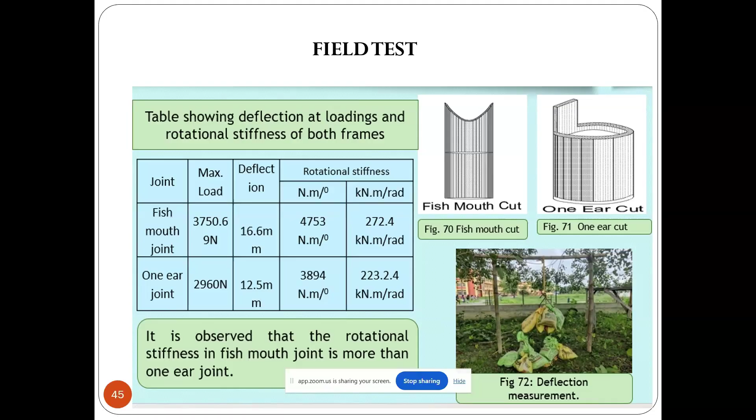It was found that the rotational stiffness in the fish mouth joint is more than one ear joint, and this is the calculation done from the graph obtained from load versus rotation graph.

This was the moment versus rotation graph. Some trend line was obtained, and those rotational stiffness values are the real life rotational stiffness values which can be used for modeling purpose.

Then modeling of the frame geometry in ANSYS software was done. The two different joints were simulated in ANSYS as a bearing provided with a revolute joint and a rotational stiffness.

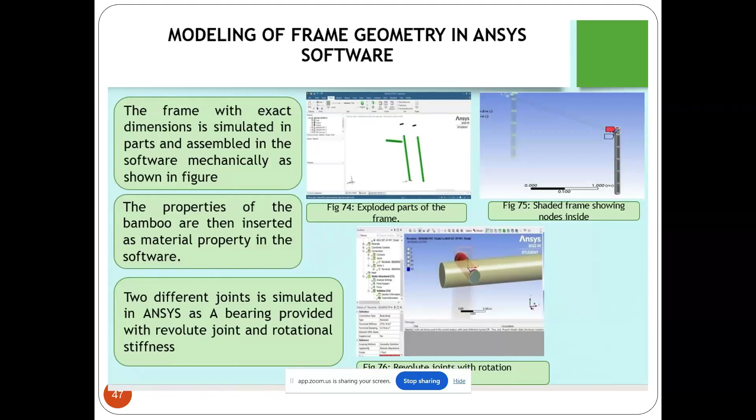The experimental deformation was 9.7 millimeter for the fish mouth joint, and ANSYS deformation gave 10.93 for the fish mouth joint, and for the one ear joint it was 12.5 and 12.656.

The deflection on both frames is calculated at the exact same loading of 2960 Newton for better comparison. Since the difference in changes is not by much extent, this validates the physical and mechanical properties of bamboo. Because the final deformation was considered at 2960 Newton physical load, these comparisons have been done corresponding to 2960 Newton.

So the deflection comparison was done for the experimental frame and the ANSYS model. For the experimental frame, it was slightly lesser. For the ANSYS deformation, it is slightly more.

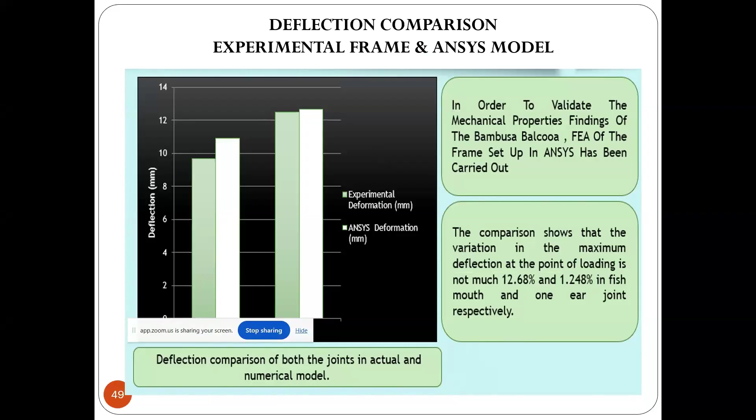These are the mode shapes of the bamboo structure for modal analysis.

From these two studies carried out, some kind of insight was obtained regarding the joint characteristics of the real bamboo frames which are traditionally used, and this is going to help in analyzing the traditional changhars where bamboo joints or bamboo-wood joints have been used, because for concrete kind of joint there is no problem.

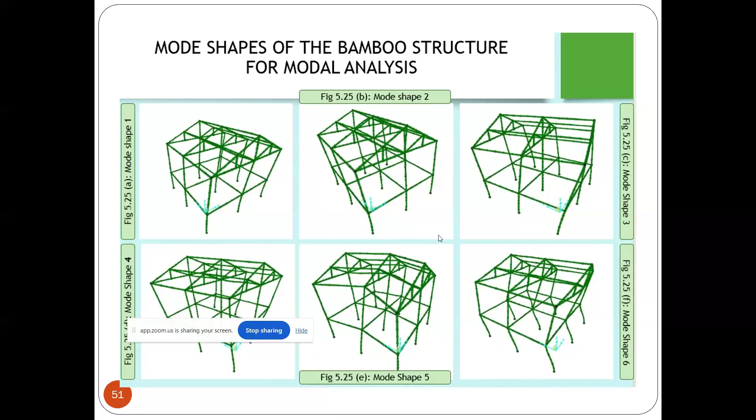The second study is about bamboo reinforced concrete. The bamboo species for the project was obtained also from RFRI, Rainforest Research Institute, Jorhat. RFRI Jorhat is now housing about 43 species under 3 generic heads. We took the most common 4 species, Bhaluka, Jati, Kako, and Mokal, for our study.

This is actually the continuation of another study. For the time constraint, I'll be discussing this study and briefly explaining the previous study.

This is the Bambusa balcooa, Bhaluka bamboo. This is the Bambusa tulda, Jati bamboo. This is the Bambusa nutans, Mokal bamboo. And this is Dendrocalamus hamiltonii, the Kako bamboo.

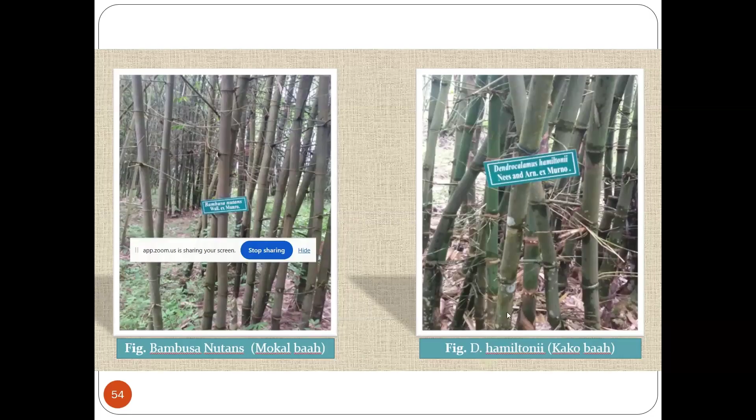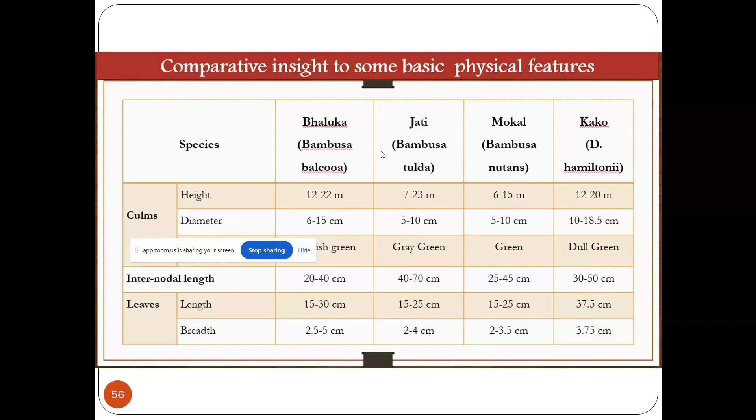Now here we are going to construct beams, bamboo reinforced beams. For that purpose there are actually two basic problems, and along with that there is a problem of decay.

The problem number one is moisture-induced dimensional instability. This moisture-induced dimensional instability we are going to address after some time. And the other one is poor interfacial bonding, which we are also going to address after some time.

But the basic thing is that bamboo is very much prone to decay by insect attacks, fungi attacks, etc. For that purpose, CCB treatment is done, and other traditional methods are there, but for bamboo splints, CCB treatment or CCA treatment is considered to be better. RFRI actually provided us with CCB treated bamboo splints.

For our study, 24 bamboo reinforced concrete beams were cast with 16 mm and 20 mm dia bars as reinforcement, as total replacement of the steel bars. Previously we did some study with partial replacement, for example 2 bars with bamboo and 2 bars with steel reinforcement. This study was done with total replacement, and beam size was 15 centimeter by 15 centimeter by 70 centimeter, the purpose being to enable it to fit in the flexural testing machine. M20 grade concrete was used with 0.45 water cement ratio, OPC cement was used, and the sand was zone 2 sand.

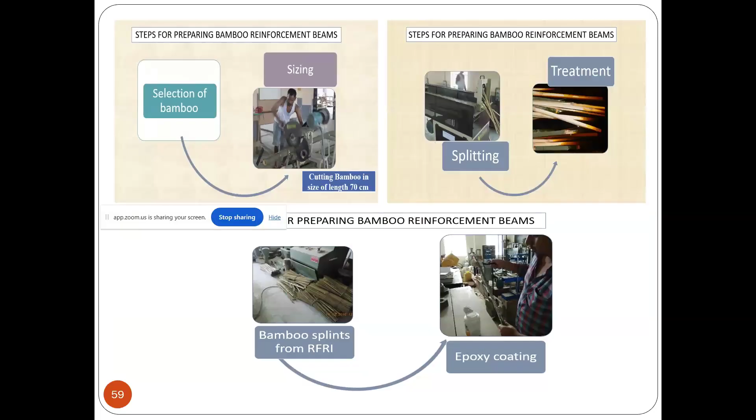To address this problem, epoxy is applied. The epoxy coating on each of the bamboo splints was done. Then the other issue is poor interfacial bonding. For poor interfacial bonding, the bamboo was rolled with GI wire. In another study, the bamboo splints which were epoxy coated were rolled with different kinds of wires, GI wires, then coir and other threads also, and pull out tests were conducted. Finally it was found that epoxy coating with GI wire gives the best bonding.

We have a paper with Abhijit Dey, an Elsevier paper, in which the frictional properties were studied, and the best frictional properties were exhibited by rolling with GI wire. Now the splints are ready, meaning our new reinforcements are ready. Then casing with the steel stirrups and preparation of the concrete was done.

Beams were cast, vibrated, cured, and tested. The beams were tested in two forms, one in the flexural testing machine, which is a static one, and the other in the UTM.

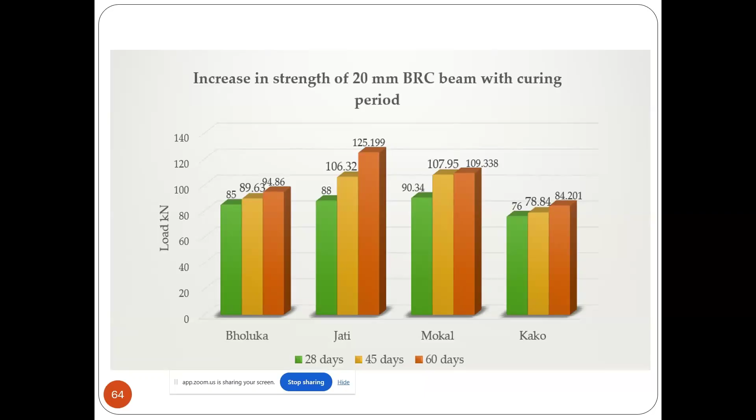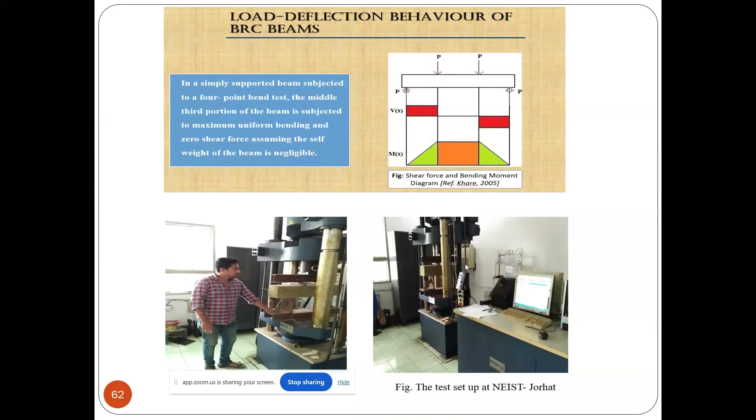This study for the beams can be extended for longer lengths, because for the easiness of calculation and due to the limitation of testing the flexural behavior, the length is limited to 70 centimeters. That's why we could go for this kind of short beams also. So there may be some kind of simulation to get the proper behavior of bamboo reinforced beams for longer lengths, and this study can then be used for design purposes of bamboo reinforced structures and behavior of beams.

Till now, there is no literature or code other than IS 15912 where the behavior of bamboo reinforced flexural members has been studied. So this is a very emerging field, and this particular study can be carried out to get a proper insight into the behavior of bamboo reinforced flexural members with different grades of traditional concrete.

So this is all about it. My special thanks goes to Saurav Juti Datta, who was my master student and did the first part of the study, that means the 4 frames. Then Hussein Mohammed, who did the prototype study. Dr. Abhijit Dey, I did not properly explain his part - he was working on the frictional properties of bamboo with different kinds of tying material, and his result was used by Mukunda Madhav Bora for the last part of my presentation. So thank you all.

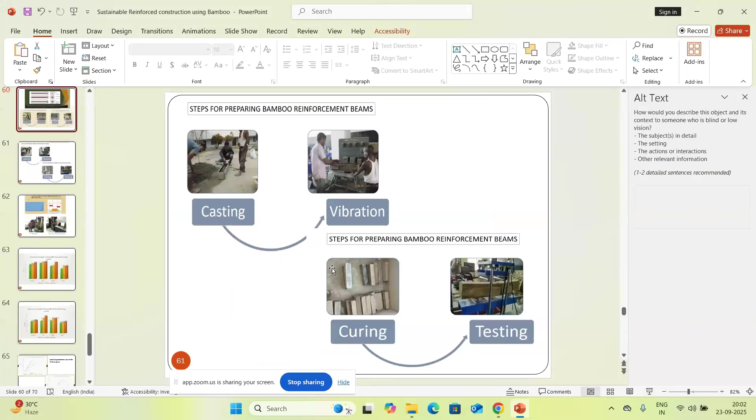We can also take a few questions in the chat box. If any document, data, or information is required, you can contact me. My contact number and everything is available on my college website. There are some other studies on bamboo frames and bamboo reinforced concrete that other students have done. If someone is interested, they can contact me.